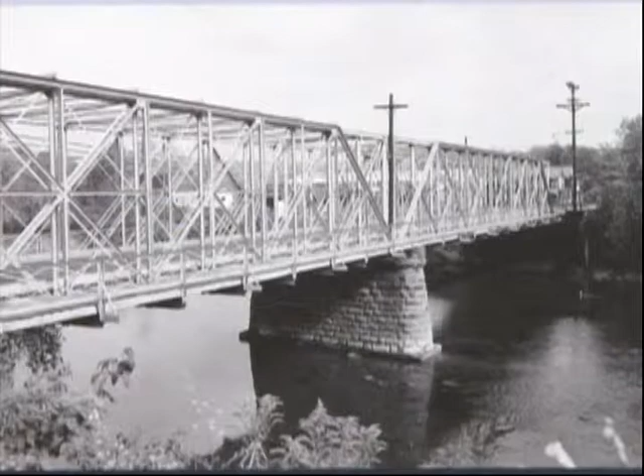Hello, my name is Noel, and I'm with McCormick Taylor. We are one of the sub-consultants working for the Crawford County Commissioners on the Mead Avenue Bridge.

Tonight's meeting is one of the final meetings for the Mead Avenue Bridge before we take the bridge to construction. We have a series of boards explaining what has happened with the project since the December 2012 public meeting, the last public meeting we held. We'll walk you through each board, and at the end cover the construction schedule for getting the bridge built.

The first board shows what has happened since the last public meeting in December 2012. At that meeting, we mentioned there were issues that could crop up, including some related to endangered mussels. There was a mussel species on the verge of being listed at that time, and if it became listed, there would be additional work we'd have to do.

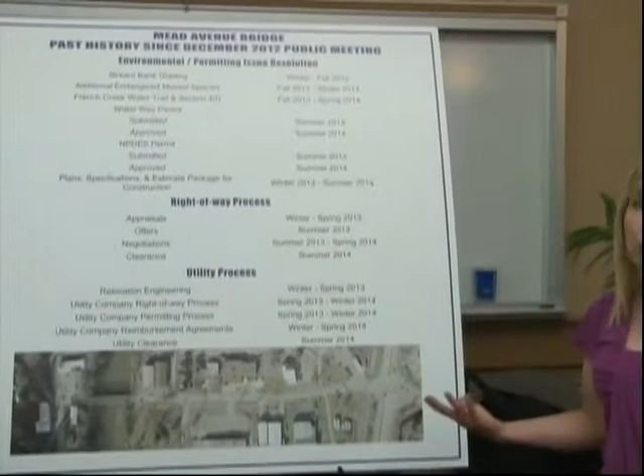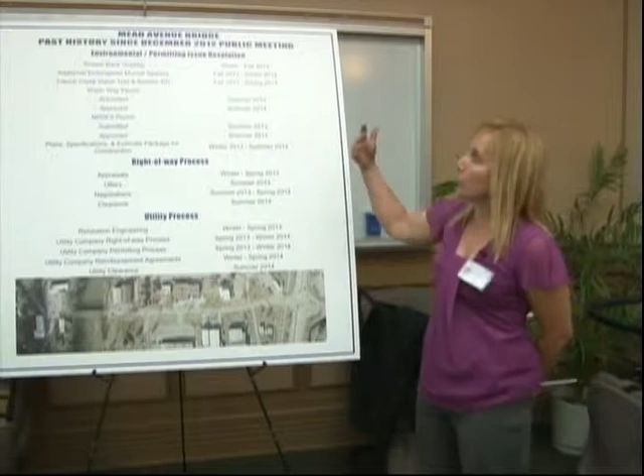That mussel species was listed in early 2013. So there were stream bank issues we had to deal with the Fish and Wildlife Service, who had concerns about how the stream was being graded, because the area being graded was one where this new mussel had a fairly large population.

We had to go back and make adjustments to the stream bank grading to accommodate the new mussel species. We also had to coordinate with the U.S. Fish and Wildlife Service to get their clearance on mitigation for that species.

The mitigation for that species, and all the previous species, is translocation, meaning we go into the stream and move the species to a new location. You'll see that work starting in September, when biologists will be in the stream moving the mussels.

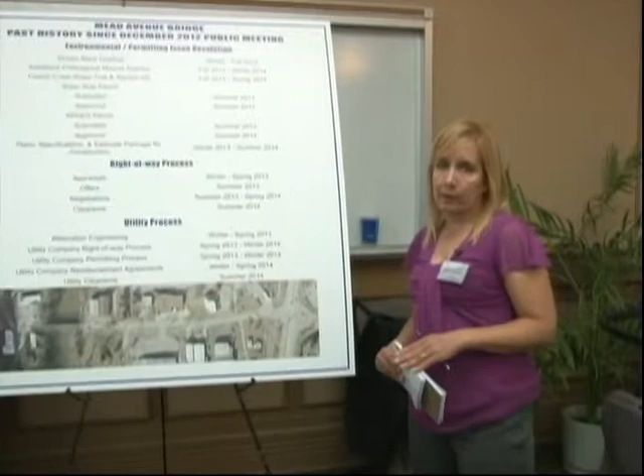Once we were through the mussel issues, another issue came about related to French Creek. French Creek was listed by the Pennsylvania Fish and Boat Commission as a PA water trail. PA water trails are public recreational facilities in Pennsylvania, and they are therefore protected under Section 4F of the U.S. DOT Act of 1966.

For those resources, we have to look at how the project will use the resource and what type of impact we'll have. With the 2013 listing of French Creek as a PA water trail, we had to go back and do another study, a Section 4F evaluation for that creek.

Once we got clearances on the 4F evaluation and the mussel species, we were able to submit our permits. We need a Chapter 105 waterway obstruction permit from the U.S. Army Corps and the Department of Environmental Protection. That permit is currently pending and should be approved within the next couple of months.

We also needed a National Pollutant Discharge Elimination System permit from the County Conservation District. We have that permit; it was just received within the past week or so. After that, we will put together the plan, specification, and estimates package for contractors to bid on.

That package has been put together in draft. The PennDOT District Office has reviewed it. It will next be reviewed by Central Office at PennDOT and the Federal Highway Administration for approval.

The other approvals we need relate to the right-of-way process and utilities. We have gotten through most of the right-of-way negotiations, and the county does have possession of the properties needed to build this bridge. We're just waiting for the final clearance for right-of-way.

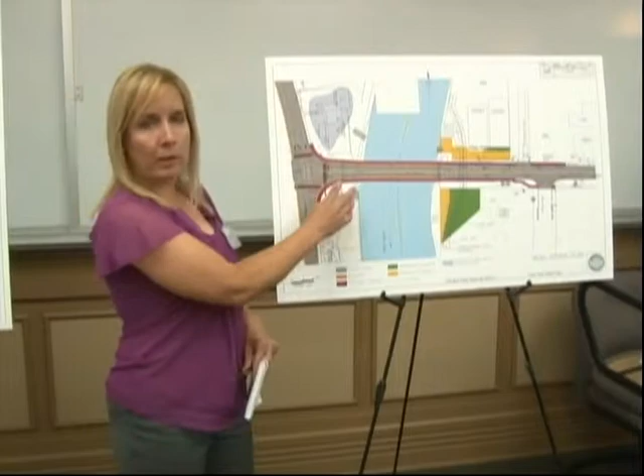This one is the Mead Avenue side. The city side, the city of Meadville, is on that side of this board. This is Lincoln Meadows, Bicentennial Park.

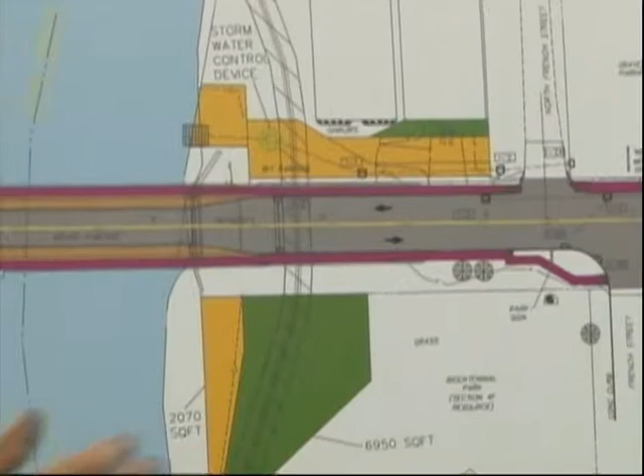What we're showing here is there will be two 11-foot lanes. That's the gray, the 11-foot lanes. There'll be 5-foot shoulders coming across the bridge, and then there will also be a sidewalk, that's this pinkish color on the bridge.

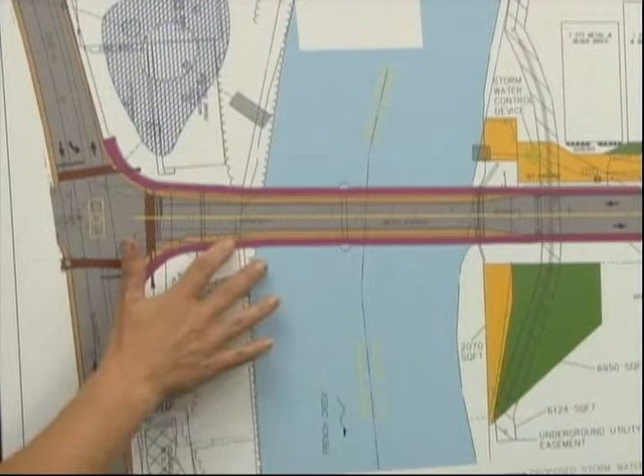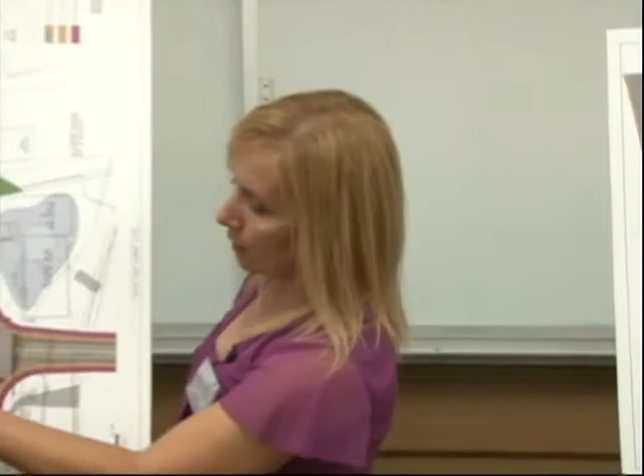At 102, there will be a traffic light installed, Hank Street, and we can show you Hank Street a little better on this map. Hank Street comes in on this side. This is Mead Avenue coming into 102. This is 102 going towards Mercer Street, and this is towards Spring Street.

There will be a traffic light installed with pedestrian push buttons. This darker reddish color are the crosswalks that will be installed for pedestrian use.

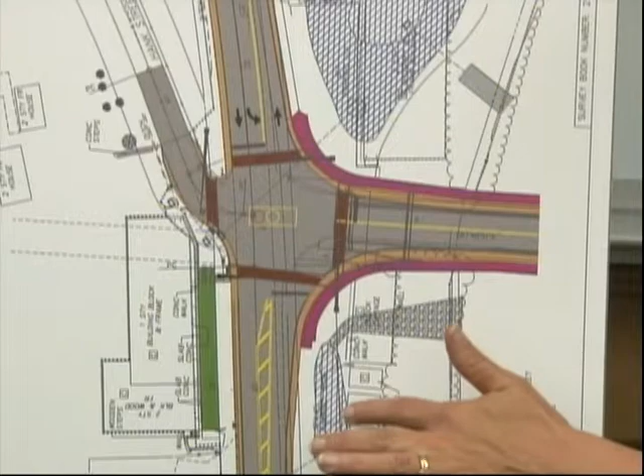There will be storm ponds installed on the Vernon Township side, the 102 side, for control of stormwater. Those ponds, once everything is filtered out, will then drain into French Creek on that side of the stream.

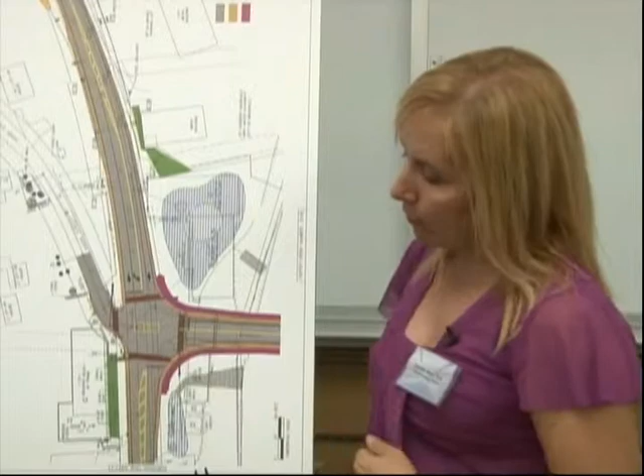On 102, heading towards Mercer Street, there will be a left turn lane on 102 for turning onto Mead Avenue. And there will be 2 lanes on Mead Avenue, as I mentioned. This is Mead Avenue going back into the city.

So that is, and this here will just be paint. There will not be any medians or any kind of barriers in the roadway. This is just paint shown on here.

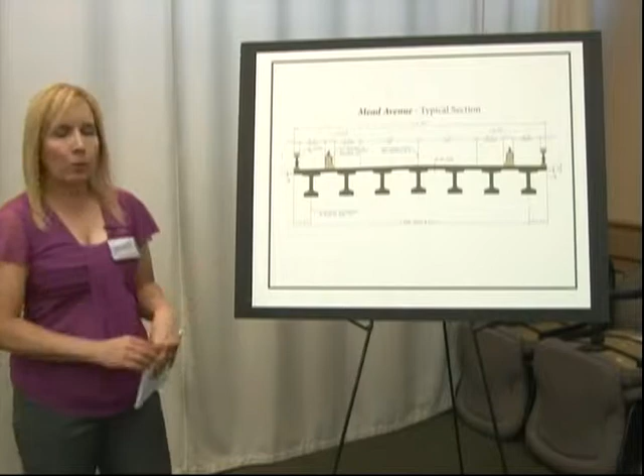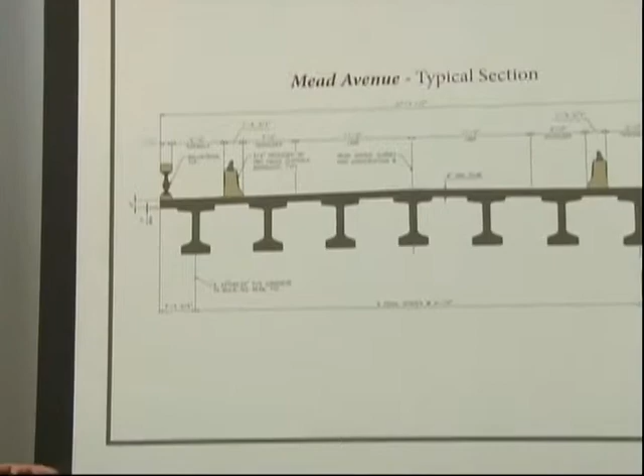This board shows a typical section of the proposed new bridge, and basically what it's showing is the difference between the truss structure that's there now and the proposed structure. The truss structure that's there now has all of the support frame above the structure. That's all the metal work you see above the structure, that's what's holding the bridge up.

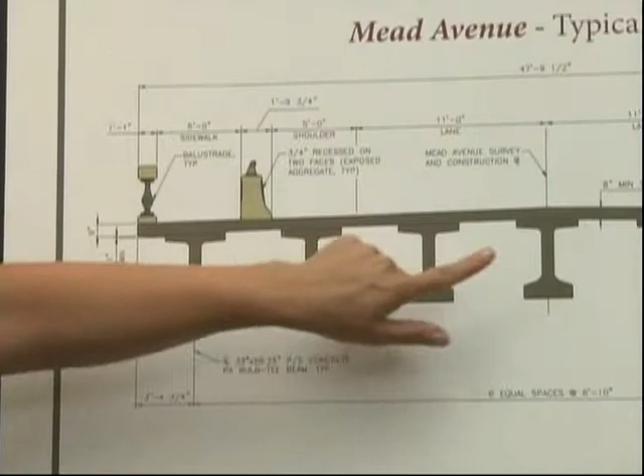The new structure, the support will be these beams underneath the structure. That's what is going to support all the weight of the structure. So that's what this typical section is showing, the difference between the truss that has it above and the new structure that has the support underneath.

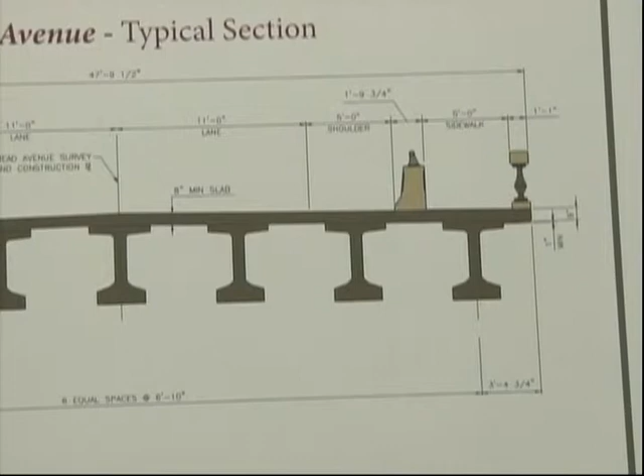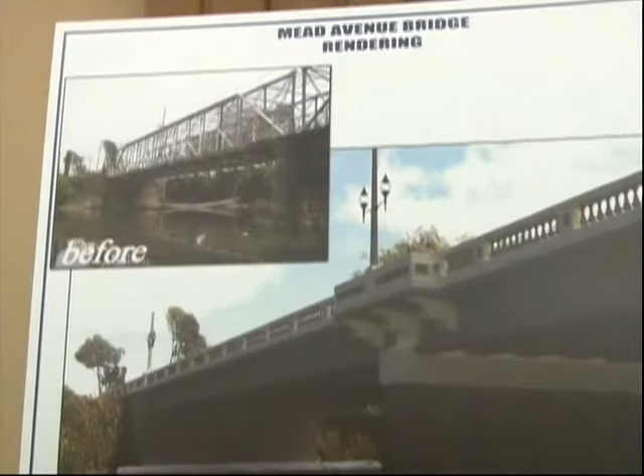This next board here is a rendering that shows you what the bridge will look like, an artist graphical representation of what it will look like after it's constructed. Up in the top corner here is the existing bridge, the existing truss bridge. The new bridge will be a conventional structure with the beams underneath.

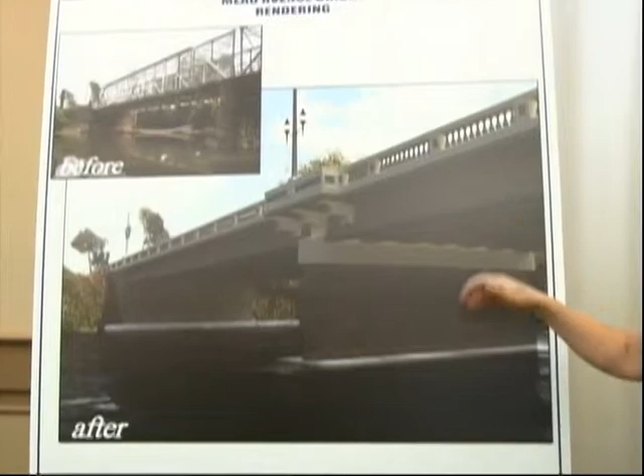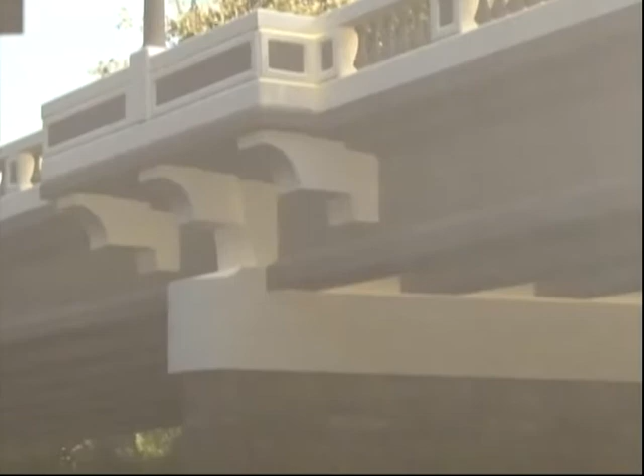We will have period lighting on the structure that matches what is currently in the city of Meadville, so that we have a consistent look throughout Mead Avenue. There will be a stone look on the abutments. It won't be actual stone, but it's going to be like a form liner to give a stone look on the abutments. There will be a parapet along the bridge that allows you to see out into the river.

There are also some bump out areas designed into the bridge so that people walking along the sidewalks will be able to stop, look at the river, or do some sightseeing as they walk along the new bridge.

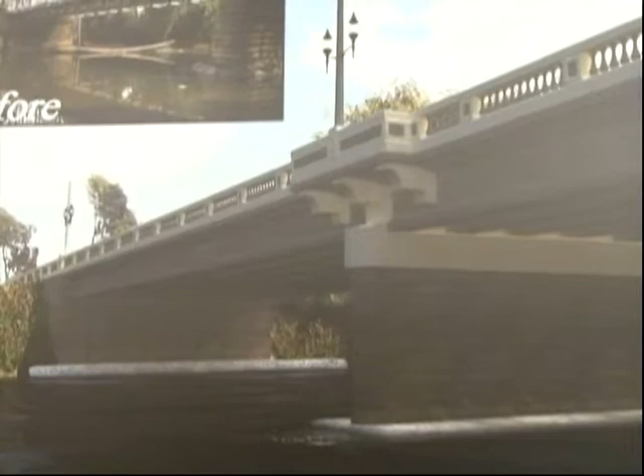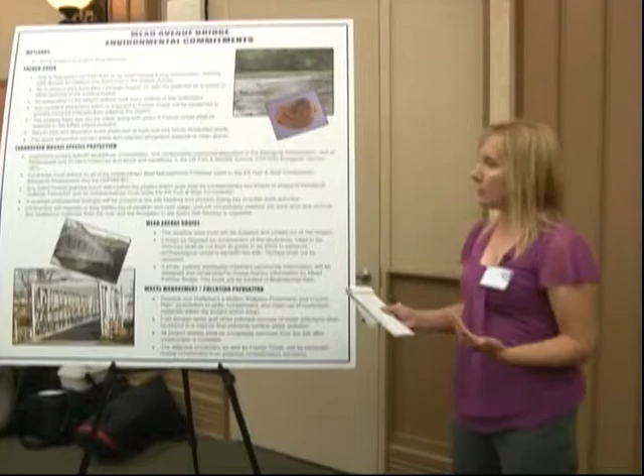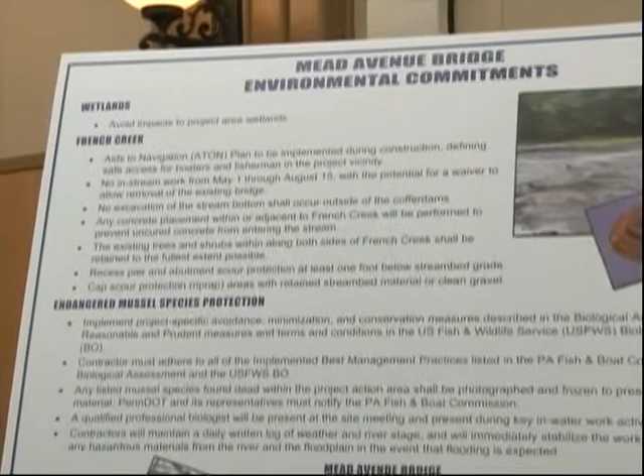In order to construct any project that uses state or federal tax dollars, there's always a series of environmental commitments and mitigation measures that go along with the project, developed out of the different clearances that come as part of the project. This board here is just showing some of the commitments that the county has had to make in order to get this structure built.

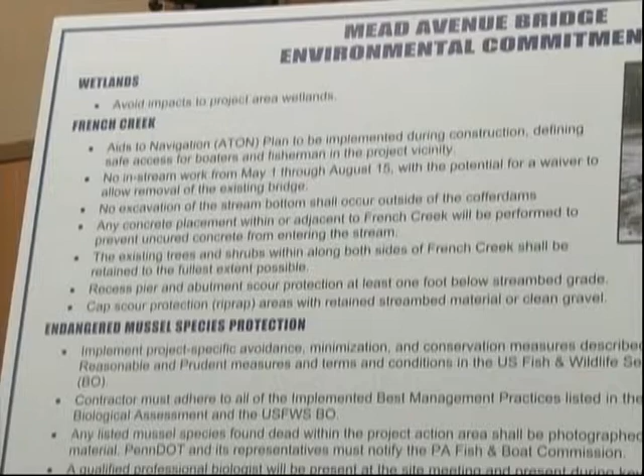Some of the commitments relate to French Creek. As I mentioned, the mussels, they have to do a translocation where they relocate all of the mussels that are currently within the impact area of the bridge.

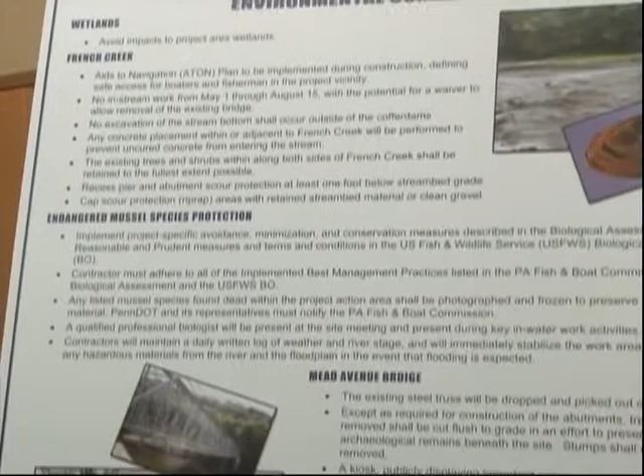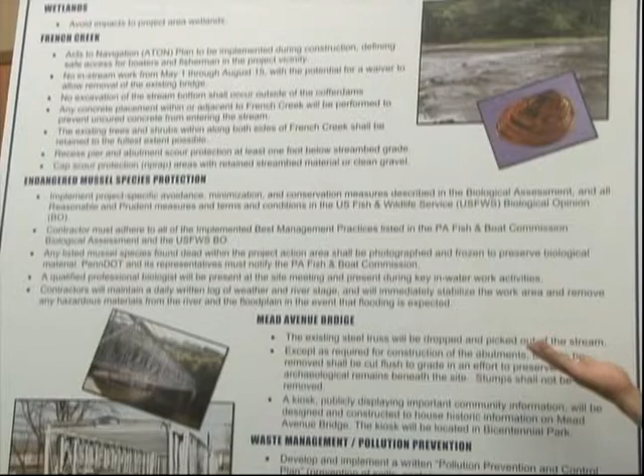Related to French Creek itself, there are restrictions for when they're allowed to get in the stream and do any work required in the water. For instance, the pier that is the center of the bridge, there are certain times when they are not allowed to work in French Creek, so they have to design the construction schedule to work around those time frames.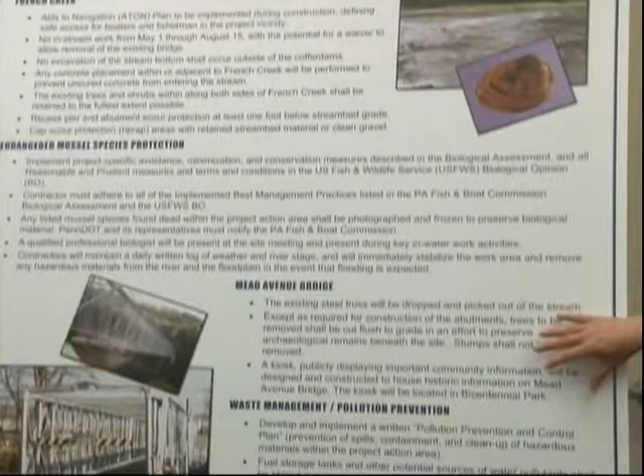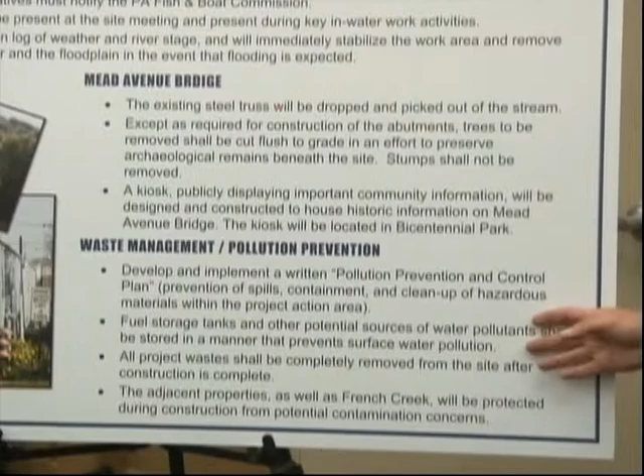There are also mitigation and commitment measures related to the existing bridge itself. And then there are additional measures related to helping protect the properties that surround the project, related to what the contractor can do with any waste materials, any runoff from the project. Those types of things are what is covered under these different types of waste management and pollution prevention measures.

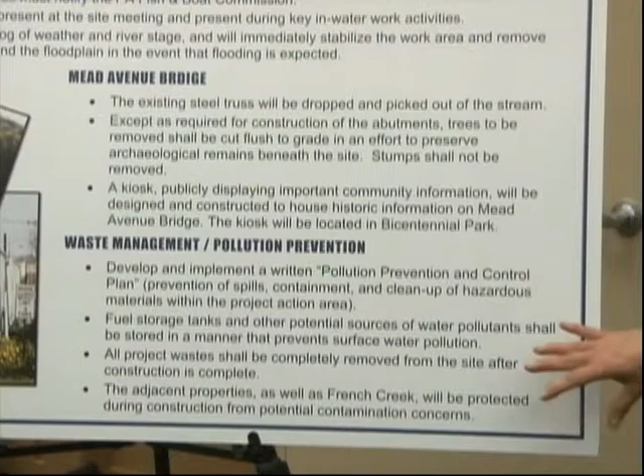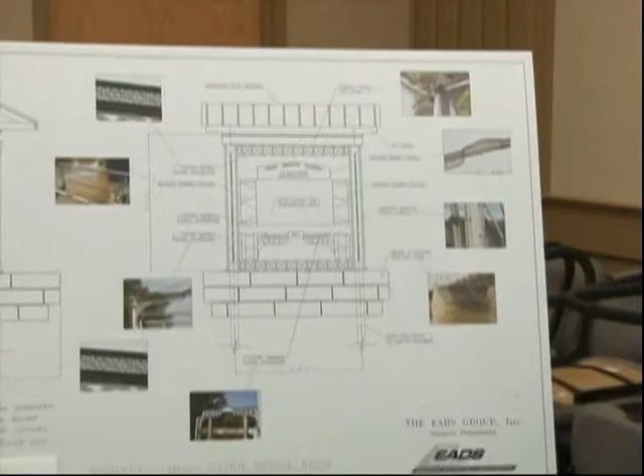These next three boards show one of the mitigation measures required as part of removing the historic Mead Avenue Bridge. This is a kiosk that's going to be constructed. Right now it's designed to use pieces of the existing bridge, some of the historic decorative moldings and other elements, and some of the stone from the abutments and piers are planned to be used on this kiosk.

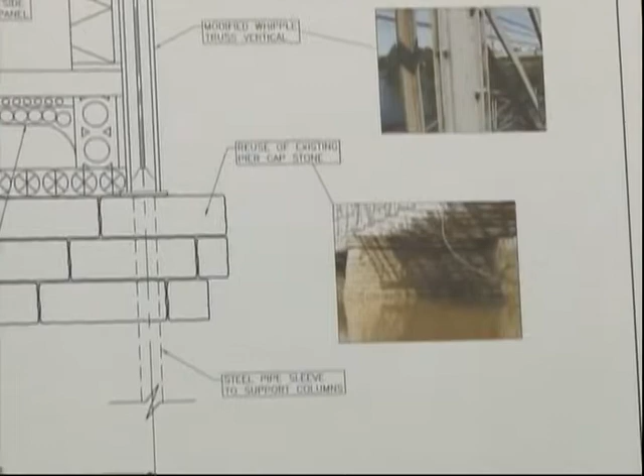The kiosk, once constructed, will hold several different panels that show information on the historic Mead Avenue Bridge and also show information on the 4th Ward area of Meadville.

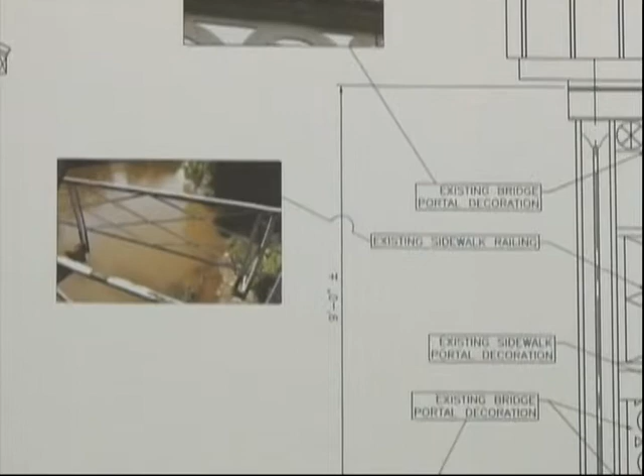There is the potential right now, just within the past few weeks, that an entity has come forward interested in possibly taking the entire bridge as a whole. If that were to happen, the design of this kiosk would need to be modified. It would not be able to use pieces of the bridge, because any effort to preserve the bridge as a whole would take precedence over using pieces of it in a mitigation measure such as this.

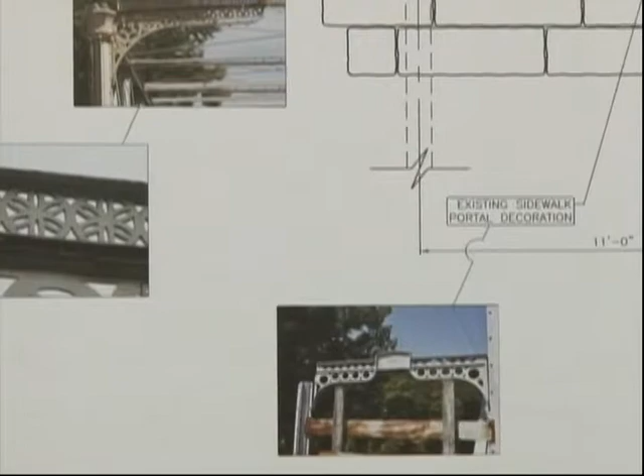But once this kiosk is constructed, in whatever format it ends up being, it will be located in Bicentennial Park for the public to visit and learn more about the existing steel truss and the 4th Ward area of Meadville.

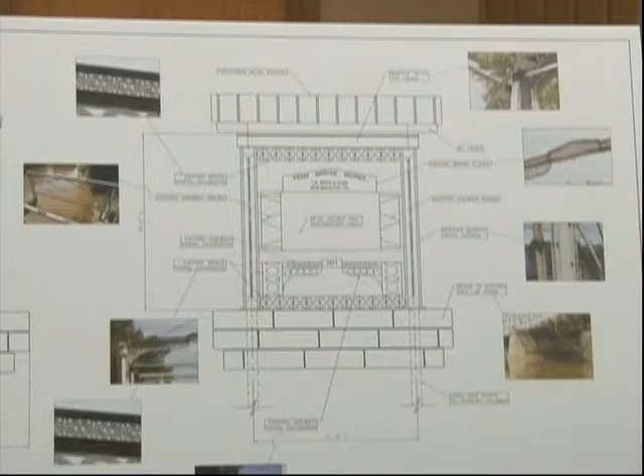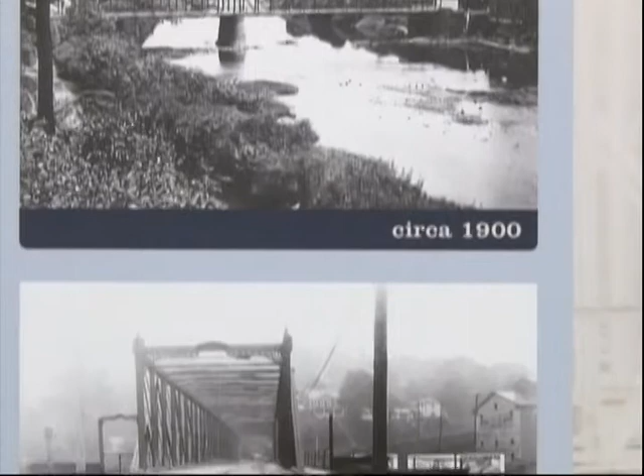These next two boards are representations of what the panels will look like on the kiosk once it's constructed. The first one shows what a general board would look like for the bridge itself. It'll contain information on the history of the bridge, historic photos, when it was built, and when modifications were made—basically a general history of how the Mead Avenue Bridge came to be.

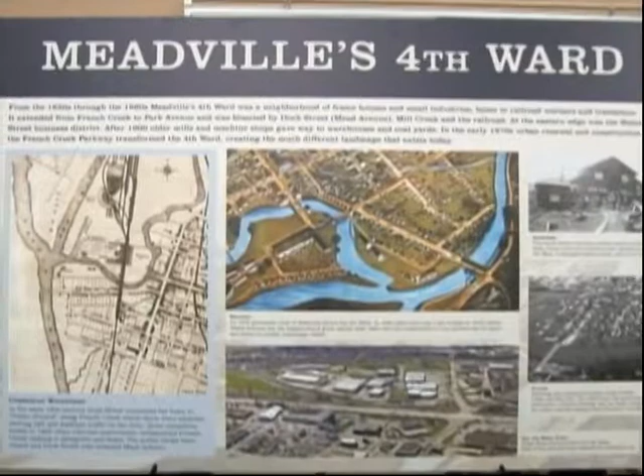And then the last board represents the 4th Ward area. It has some maps and information about the 4th Ward.

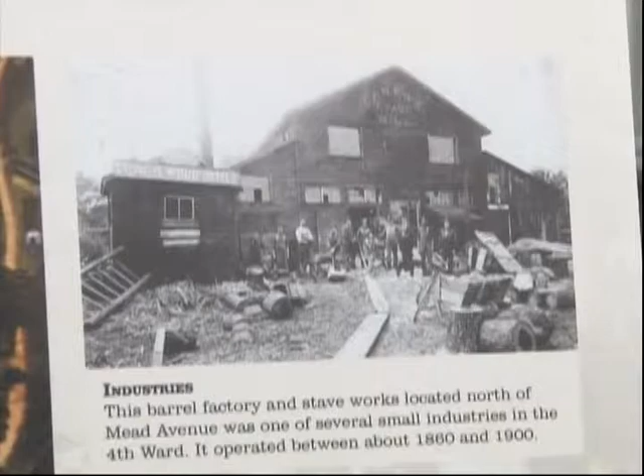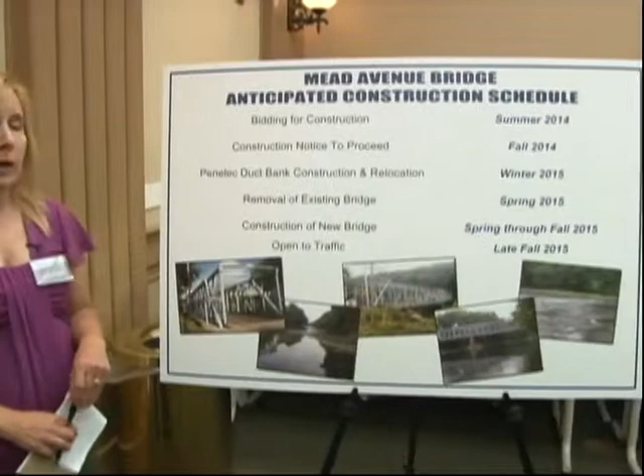This final board shows the schedule for getting this bridge to construction and open to traffic. The plan right now is that construction documents will go out to various contractors for bidding in late summer of 2014. The notice to proceed is anticipated in fall of 2014, which starts construction. Before construction can begin, the existing bridge has to be removed.

But in order to remove the existing bridge, the overhead electric lines currently on the Meadville side that cross over Mead Avenue very close to the edge of the existing bridge need to be relocated. Penelec is going to relocate them underground in a duct bank.

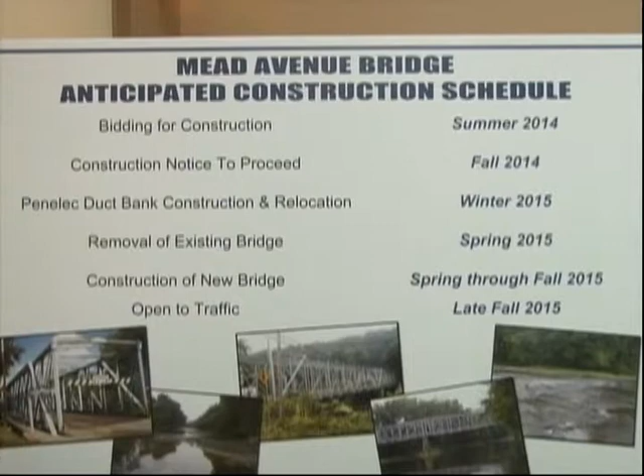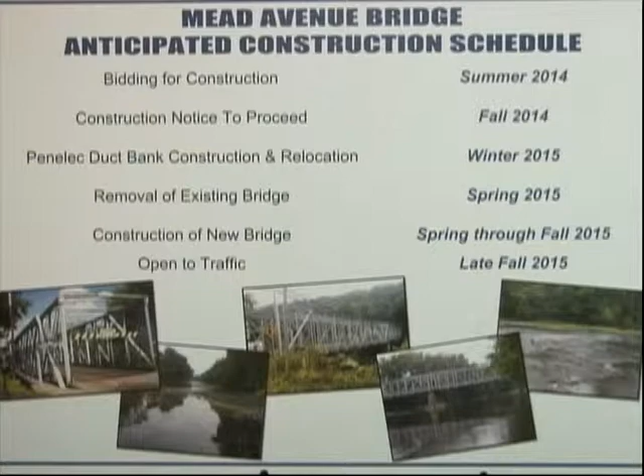So once notice to proceed is received, the first thing you'll see is Penelec getting out there, probably very late this year or early next year in the winter of 2015, constructing that duct bank and relocating the overhead lines underground. That will allow the contractor to move in cranes and other materials needed to remove the existing bridge.

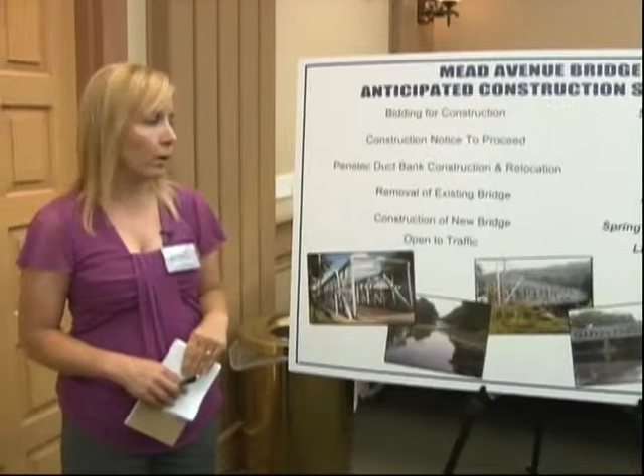Starting in the spring of 2015, the contractor will work to remove the existing bridge. Once it's removed, the new bridge will be constructed, and it's anticipated that by fall of 2015 the new bridge will be completed.

Once the bridge is constructed, there will be a mill and overlay done, as mentioned, in order to repave all of Mead Avenue from 102 out to SR 19. Then in late fall of 2015, we're anticipating that the bridge will be open to traffic for use.

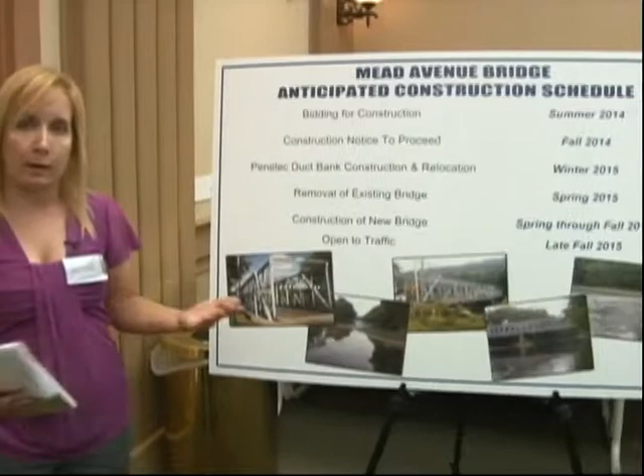I want to thank you for listening to our presentation on the Mead Avenue Bridge. We look forward to beginning construction on this project and having this bridge open to traffic for you as soon as we can—probably late fall.